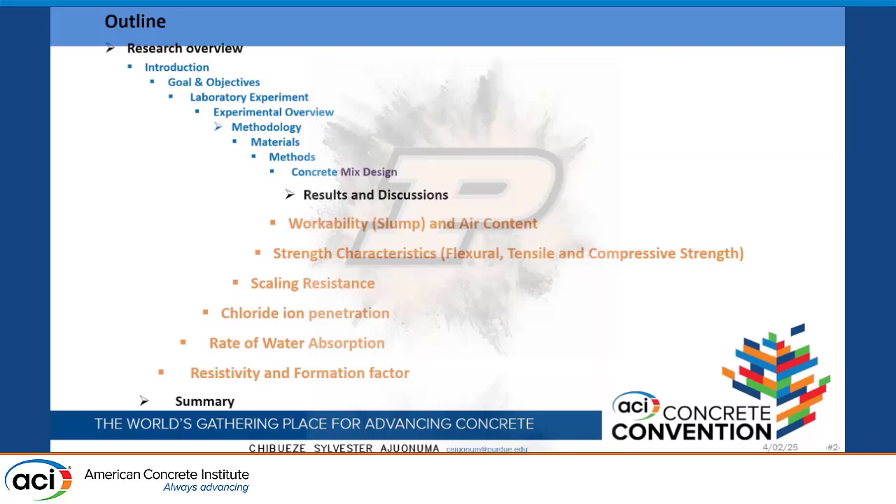Then we'll proceed with the discussion on the results. For our results, we'll talk about the fresh properties, where we'll look at workability, slump, and air content. I'll proceed to the strength properties, where we'll consider the flexural, tensile, and compressive strength. Then some durability properties of our experiment, where we'll look at scaling resistance, chloride ion penetration, the rate of water absorption, the resistivity, and formation factor.

It's a well-known fact that concrete production has been a vital contributor to global carbon emissions, and we cannot overemphasize this. But beyond this, we find that the growing demand for sustainable construction is driving innovative solutions aimed at enhancing both the durability and service life of concrete infrastructures.

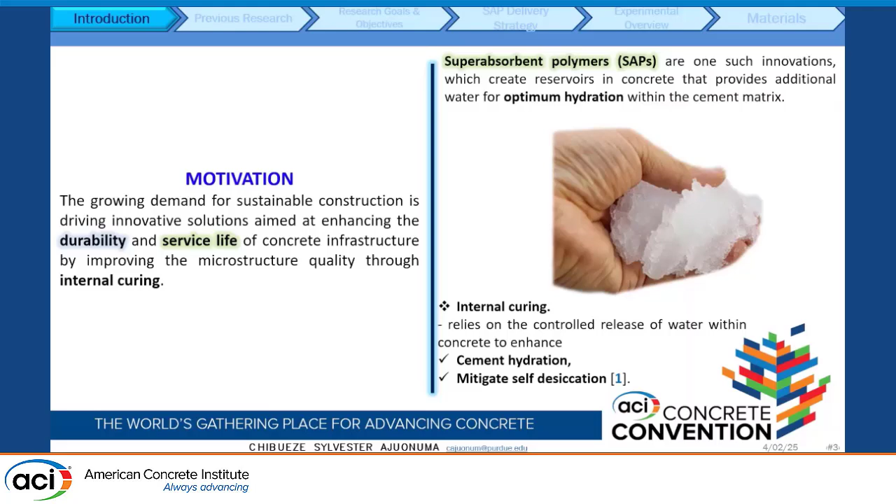We will do this through improvement of the microstructural quality through internal curing. We found that internal curing and superabsorbent polymers, also known as SAP, are key innovative solutions because they create reservoirs within the concrete infrastructure, which provide additional water to aid hydration. We've also noticed that internal curing relies on gradual, controlled release of water within the cementitious matrix, which helps cement hydration and mitigates self-desiccation.

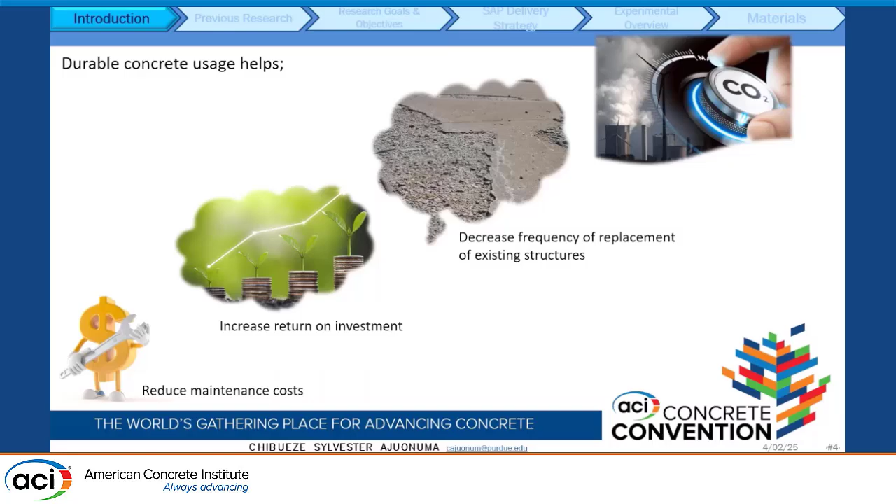This gives rise to more durable concrete, because durable concrete helps reduce maintenance costs, increase the return on investment, and most especially decrease the frequency of replacement of existing structures, and decrease carbon emission.

Just a little overview of superabsorbent polymers, also known as SAPs, or hydrogels. They are cross-linked polymers which have the capacity to absorb a large volume of fluid in comparison with their own mass, forming insoluble hydrogels. They act as internal reservoirs in the concrete, and can also be an alternative to pre-wetted lightweight aggregate for internal curing purposes.

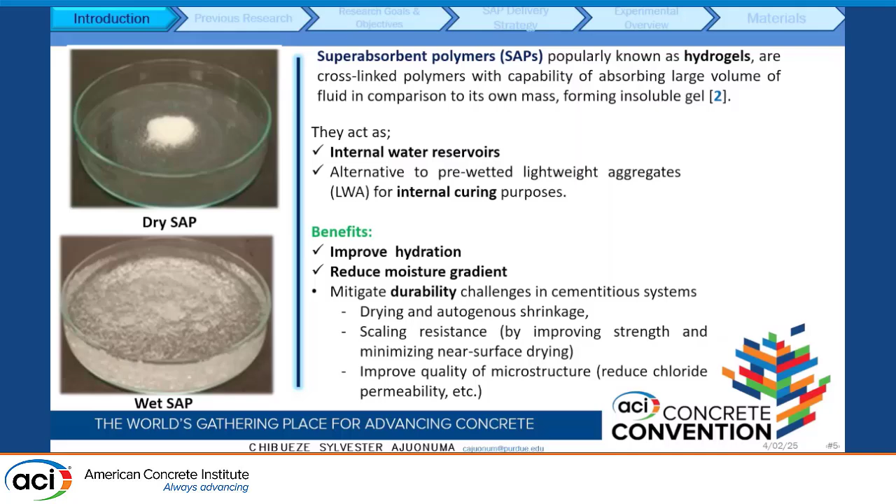From past research, we found that some of the benefits include improved hydration, reduced moisture gradient in concrete, and most especially, mitigation of certain durability challenges: autogenous shrinkage, drying shrinkage, and scaling resistance. They also help improve the quality of the microstructure of the concrete.

From the past research we did, we were able to evaluate the absorption capacity of the SAP needed for this project. We were also able to find the optimal mixing sequence — because most people ask us, when do we add SAP in concrete? We're able to evaluate the mixing sequence. You can scan the code if you're interested in some of the reports we submitted, our past reports.

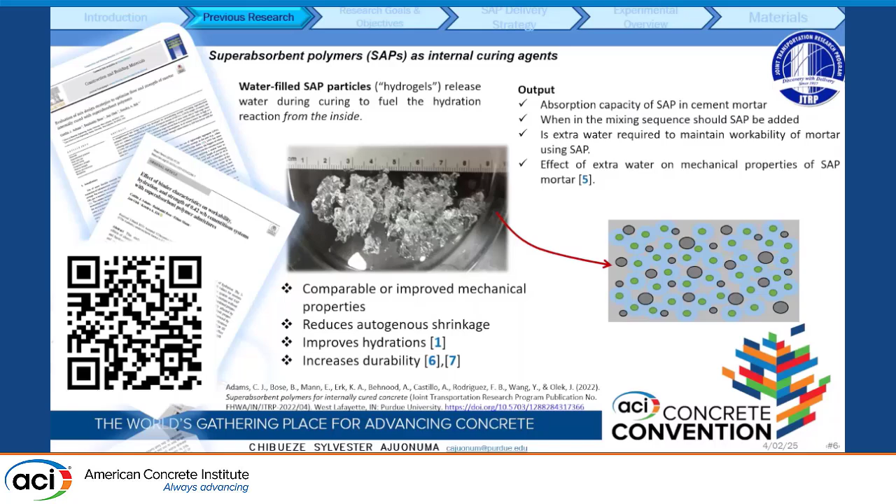Another question we often get is whether we need extra water when adding SAP. We found that you can add SAP without adding extra water, and we also studied the effect of extra water on the mechanical properties with SAP. From this research output, we found comparable or improved mechanical strength, reduced autogenous shrinkage, improved hydration, and increased concrete durability.

Now, for the current project, our project goal is to determine how to deliver the SAP in the field — because beyond the laboratory experiment, how do we actually deliver the SAP in the field?

Our current project goal is to determine how SAP delivery and the mixture composition can affect the curing performance of concrete containing commercial SAP formulation, Type IL cement, slag cement, and colloidal nanosilica. Some of the objectives: we evaluated the internal curing performance of concrete containing commercial SAP, slag cement, Type IL cement, and colloidal nanosilica.

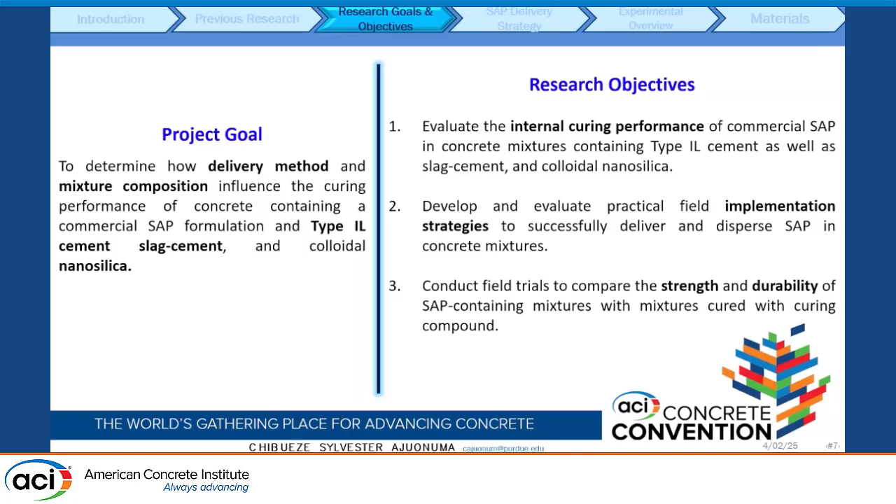Secondly, we developed and evaluated SAP delivery strategies for practical implementation of superabsorbent polymers in the field. Finally, we conducted a field trial where we evaluated the strength and durability properties of concrete containing SAP, and also concrete that we cured with a normal liquid curing compound.

For the second objective, how do we deliver SAP in the field? We developed this: we prepackaged SAP in dissolvable bags. These are water-soluble bags, which we just throw into the mixer, and it automatically dissolves. We're able to prepackage 1 pound of SAP in this bag.

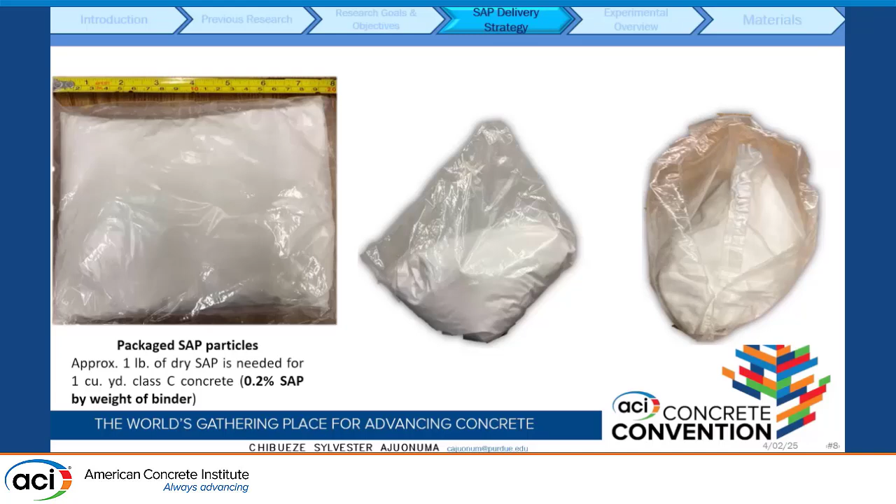This 1 pound of SAP is equivalent for 1 cubic yard of concrete, and we dosed at 0.2% by the cementitious weight. This bag was also, in order to protect it, enclosed in a waterproof bag, because it reacts with water.

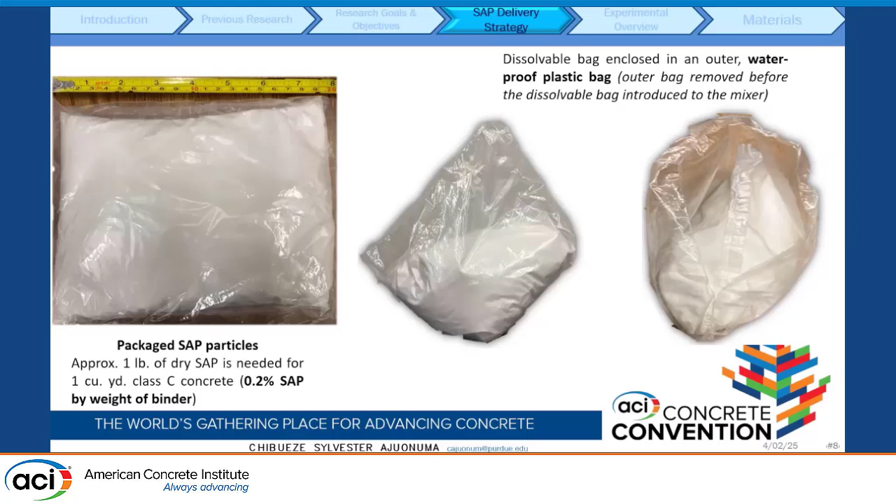So we enclose it in the waterproof bag, which we open, and then toss the dissolvable bag into the mixer. Why I want to point this out, because the field trial was done in a commercial batching plant, so we needed to find an easy way to batch the SAP.

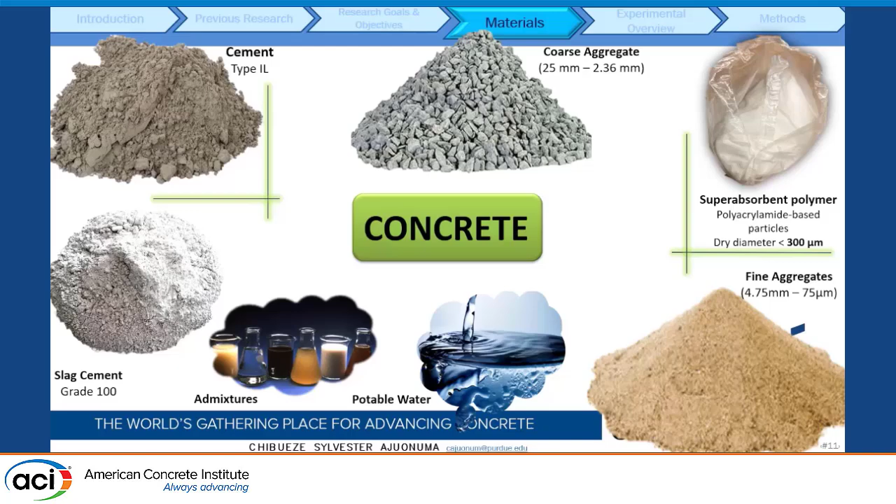For the dissolvable bag, we did some laboratory experiments to evaluate the effectiveness of this dissolvable bag in the field. These are some of the concrete mixing materials we used, and then the mix design for the field. In the laboratory experiment, we scaled down the bag.

Because we needed, that was 1 pound bag for 1 cubic yard, but in the lab we don't need to make one cubic yard of concrete. So we scaled down the dissolvable bag by batching the quantity of SAP we needed, and we had 5 mixes where we had the reference mix.

Then we added 2 delivery methods for the SAP: directly pouring the SAP and using the dissolvable bag. We also did 30% slag replacement, and then also added SAP directly, and then also used the dissolvable bag, to be able to see the effectiveness that the dissolvable bag works effectively before we proceeded to the field trial.

In some of the experiments, from our design, our target slump was between 3 to 5 inches, and air content was between 5 to 8%.

For the laboratory experiments, for the mixtures without SAP, we didn't use a high range water reducer, but for mixtures with SAP, in order to improve the workability, we added a high range water reducer at 400 milliliters per 100 kg.

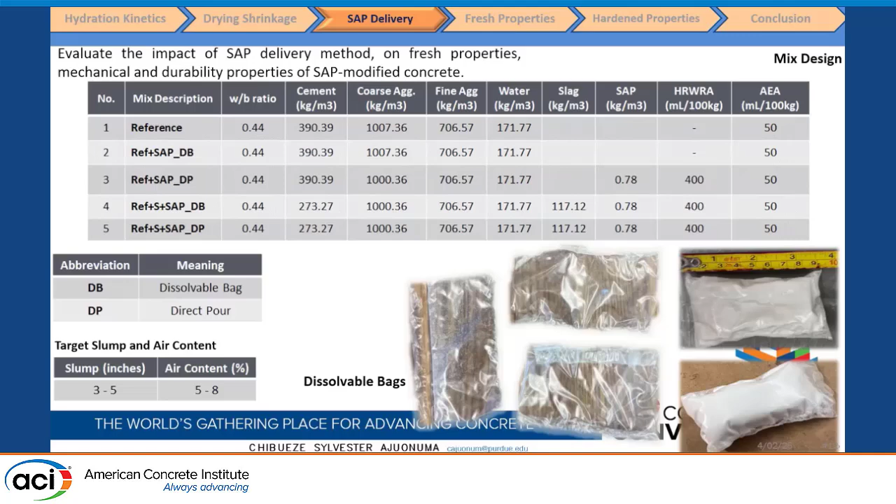We also used air entraining admixture to be able to meet our target air content of 5 to 8%. We tested for the laboratory experiment, for fresh properties the air content, which is very important for us, and then the slump.

We found that for the reference mix, the slump here is at 7 inches, but with the addition of SAP, we found a comparable result from the SAP delivery methods using both the dissolvable bag and directly pouring the SAP. The slump with direct pouring of SAP was at 4.5 inches, whereas using the dissolvable bag was 5 inches, which is close.

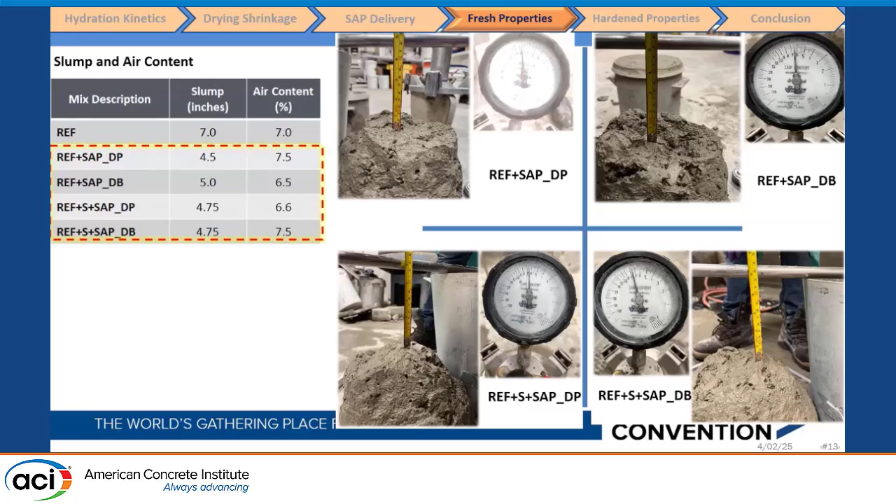For the slag, 30% slag replacement, we had the same slump value and slightly varying air content value. Then we proceeded with the strength characteristics, testing compressive strength at 3 days, 7 days, and 28 days.

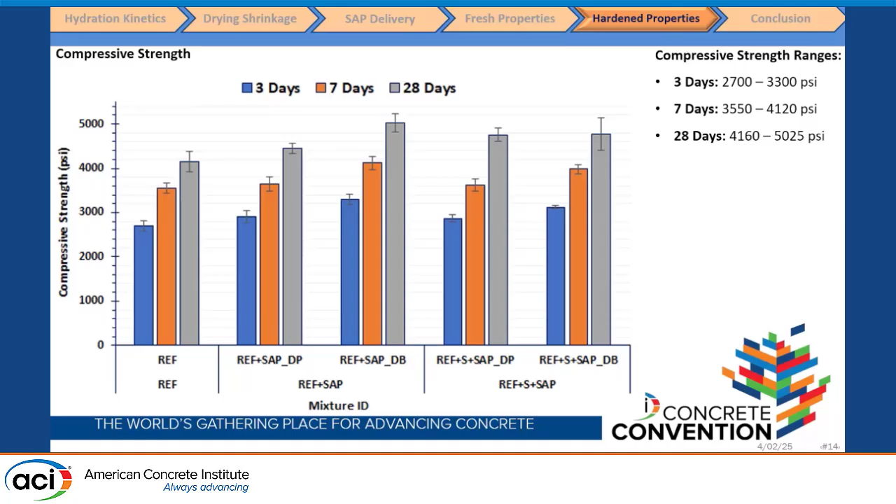We also found correlating values between the direct pouring of the SAP and the addition using the dissolvable bag. The strength values at 3 days were around 2700 to 3300 psi, at 7 days 3500 to 4100 psi, and at 28 days 4100 to 5000 psi.

We also tested for flexural strength at 28 days, and we also had relatable values for the flexural strength at 28 days in both SAP delivery methods.

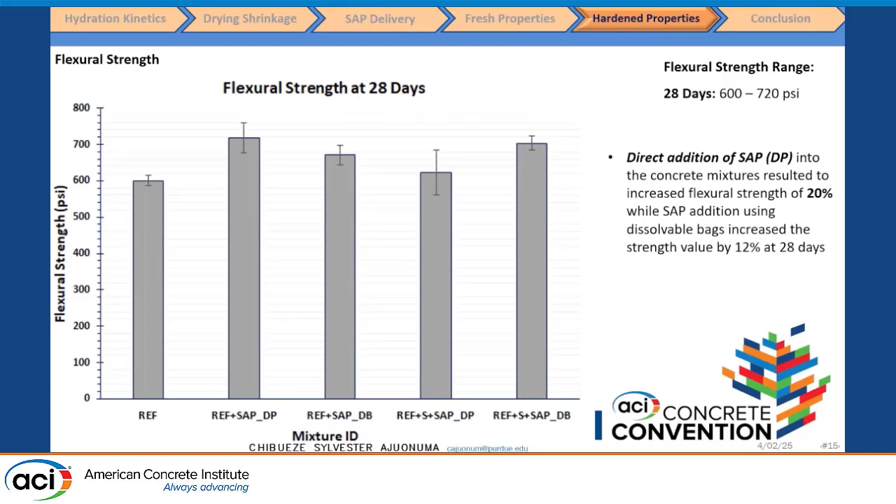Further, we also tested for ultrasonic pulse velocity, using beams and cylinders. We found that the direct addition of SAP had a marginal increase at 3, 7, and 28 days, and also a similar kind of increase using the dissolvable bag, which is DB.

It's a 3%, 4% increase at 28 days, which is also comparable with that of the direct pouring of SAP. The same trend was also observed for the 30% slag replacement.

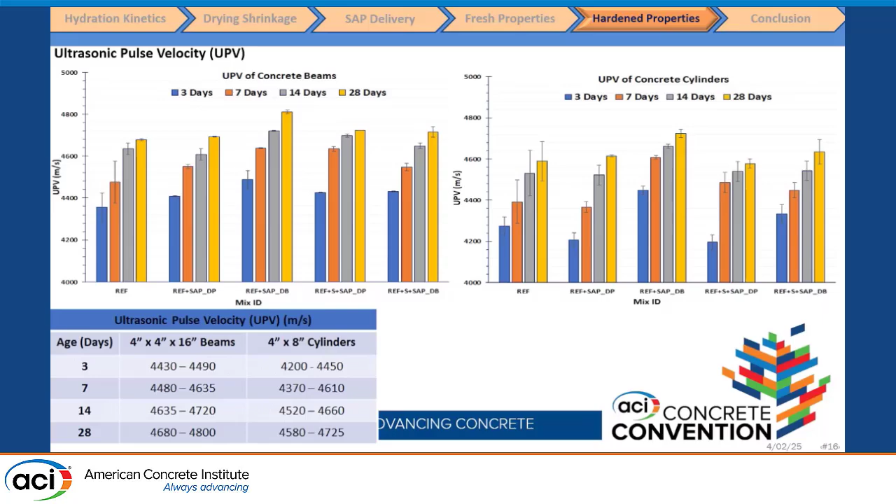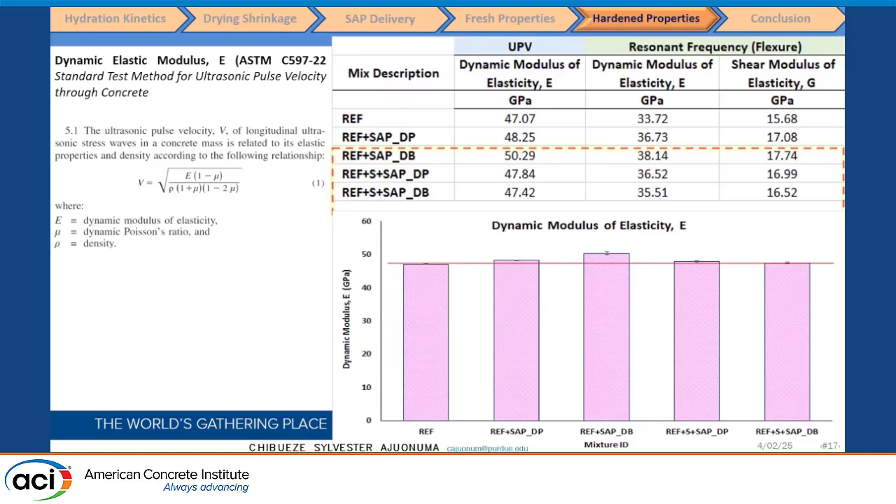With this, we tested for the stiffness of the mix, specifically the dynamic elastic modulus. We found that for both the dissolvable bag and direct pouring methods, the values were close, as can be seen from the plot. We tested using two types and found correlating values. After this, we proceeded from the lab to the field.

We were able to move where things became more interesting when we proceeded to the field. This is the concrete mix design we used for the field.

This is based on the Indiana Department of Transportation Class C concrete, requiring 658 pounds per cubic yard of cement, a water to cement ratio of 0.44, slag replacement of 30%, and we also added SAP at 0.2% by cubic yard by weight of cement.

Since the concrete was batched in a commercial batching plant, we didn't use a high-range water reducer at all. The target slump was between 3 to 7 inches, and the target air content was 5 to 8%.

For the mix, we had six slabs, each 8 feet by 8 feet by 10 inches. Slab number 6 was a reference slab. Slab number 7 was the addition of nanosilica to the reference slab.

Slab number 8 replaced 30% of the type 1L cement using slag cement, and the grade of slag cement we used was grade 100.

Slab 9 used the 30% slag replacement along with the addition of nanosilica. Slab number 10 was almost the reference mix, 658 pounds per cubic yard of cement, but with SAP added. Slab 11 was the 30% cement replacement combined with SAP.

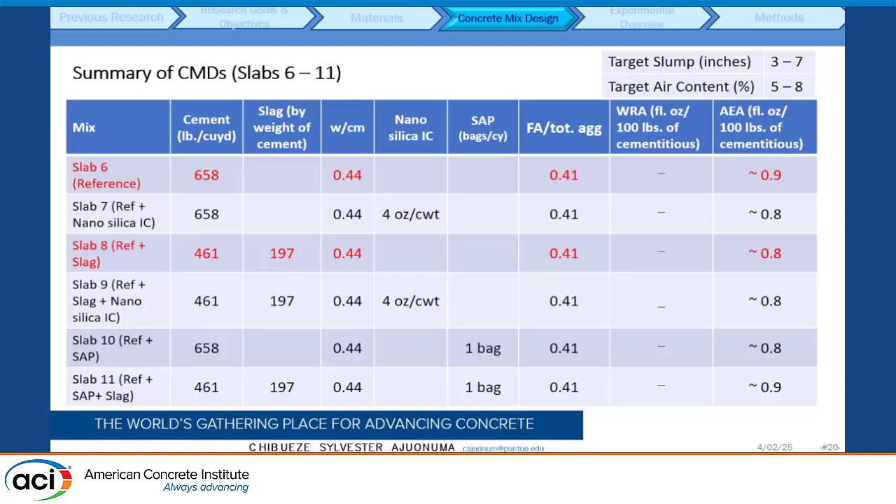This here is the CAD drawing we proposed, and this is the formwork in the field. It was a very cold September morning.

We also hired the services of professional concrete finishers to help us finish the concrete, so we could get a near real-life concrete finishing.

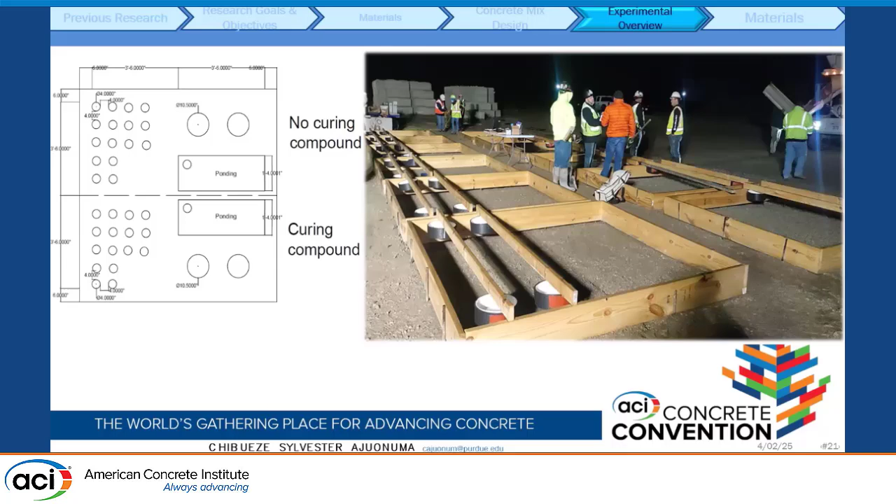And the slabs were cast.

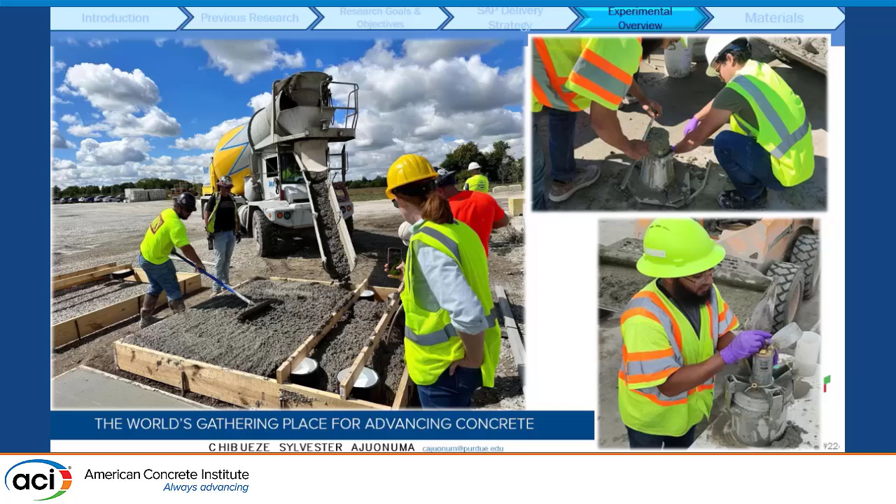We also made provisions and improvised for some cylinders, which we eventually extracted to test for scaling resistance. We tested for fresh properties, both the slump and the air content, in the field.

This is the work of the professional concrete finishers. We ensured that the concrete surfaces were finished to replicate a real-life application.

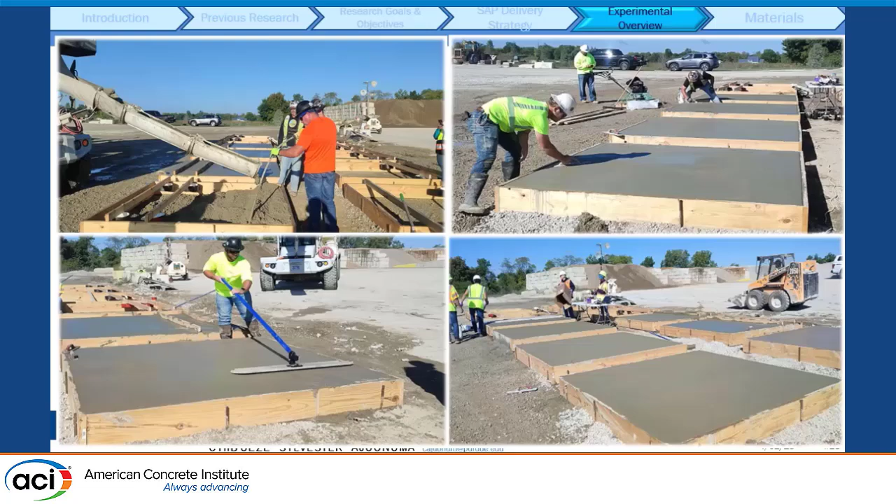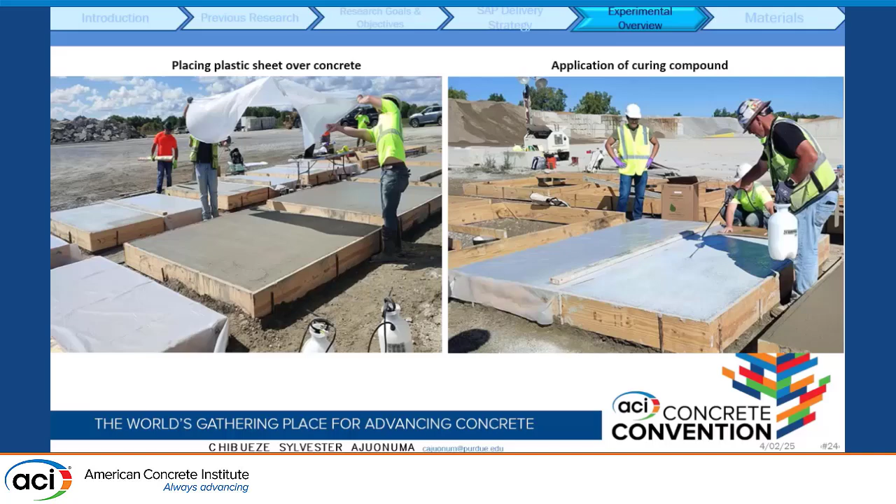For curing purposes, plastic sheets were used. The slabs were segmented, with half covered using a plastic sheet, and the other half treated with an applied liquid curing compound. This is an overview of the slabs we had.

We had slab number 6, the reference slab, as well as slabs 7, 8, 9, 10, and 11. We also had some beams.

We cast 12 beams, 6-inch by 6-inch by 18-inch, for flexural testing, as well as some prismatic samples for drying shrinkage testing.

We also had some cylinders which we cast in the field but transported back to the laboratory so we could test them in the lab.

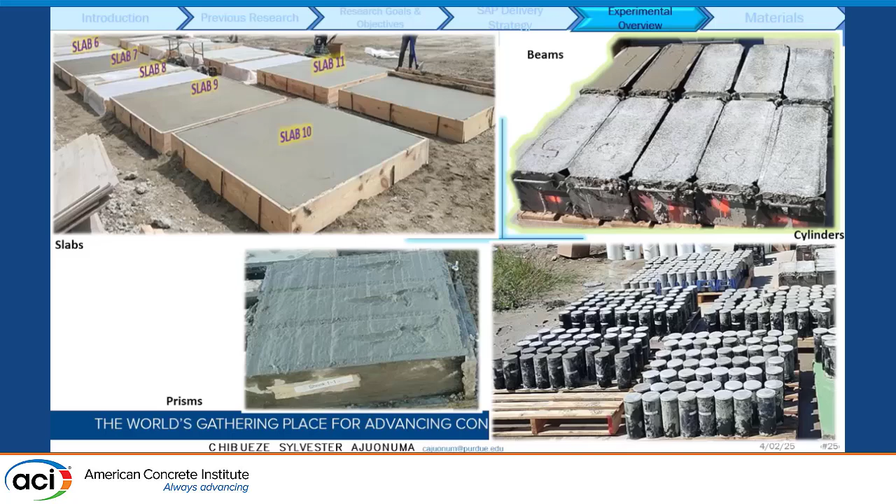At testing ages of 7, 28, 56, 90, and 365 days, cores were extracted from the slabs in the field and taken to the lab for testing.

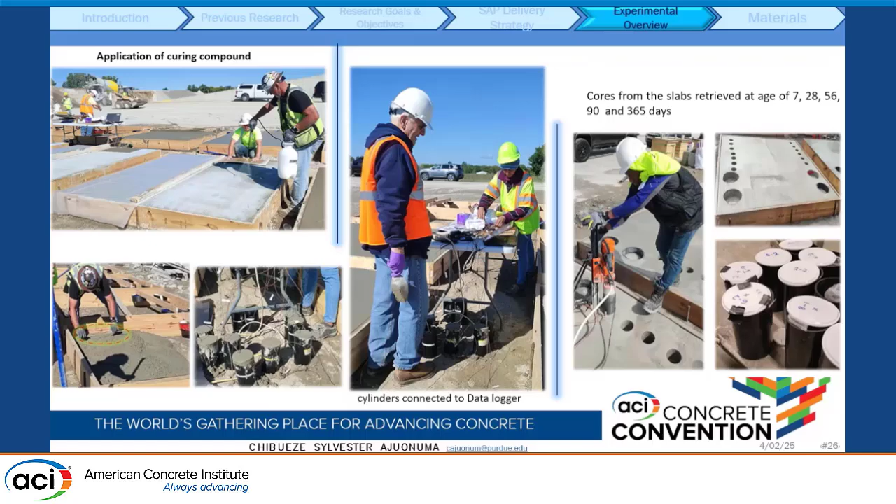We also had two curing regimes for this experiment: lab curing and field curing. We had specimens cast in the field but taken to the lab, where conditions included a constant temperature of 23 degrees, relative humidity of around 50%, and wet curing.

Some of the variables included curing compound applied on some samples and not on others, as well as the addition of nanosilica and samples with SAP.

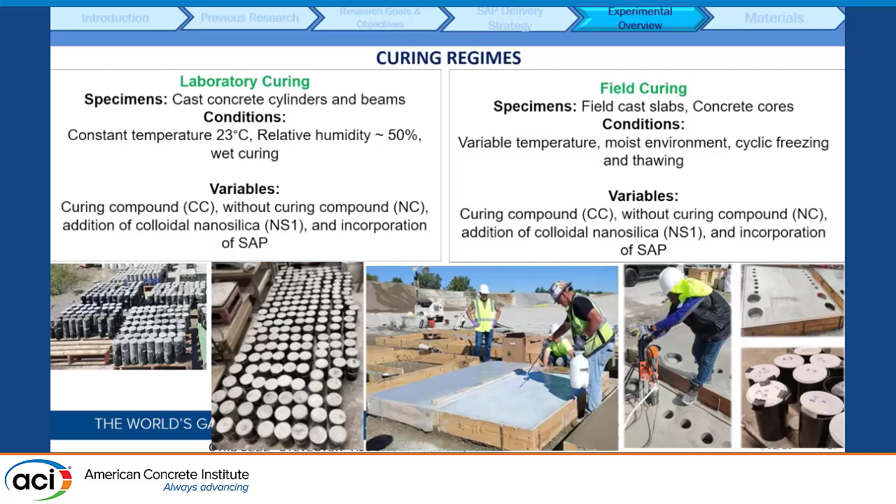For the field cured experiment, we had variable temperature, cyclic freezing and thawing, and moist conditions. We applied the same variables for the testing method we used.

We tested for fresh properties using the relevant ASTM procedures, along with specimen specifications. We tested fresh concrete for compressive strength using cylinders, and for flexural strength using 6 by 6 by 18 inch beams.

For splitting tensile strength, we extracted cores from the slabs in the field and tested them. For scaling resistance, we also extracted and tested cylinders, as well as for resistivity and formation factor.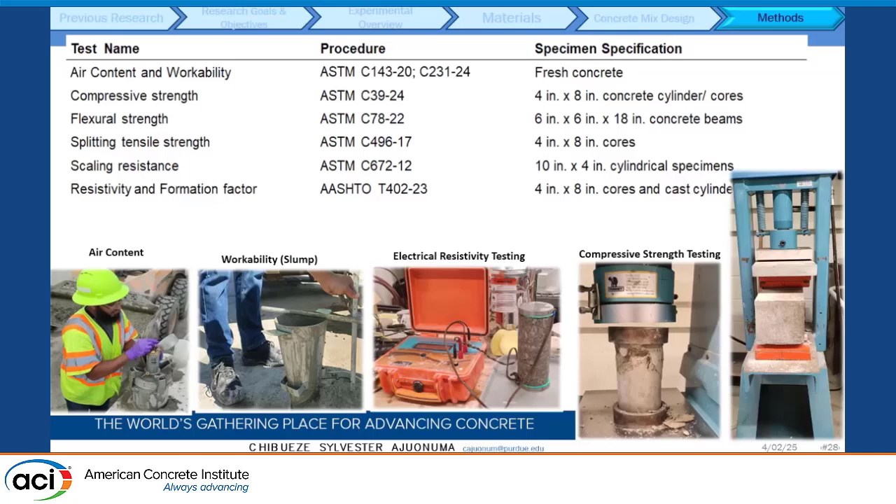For the scaling resistance, during the formwork we improvised by creating special 10-inch by 4-inch cylinders, which we extracted. We power washed them to remove the curing compound, and they were diked using a 4% calcium chloride solution.

They were diked and exposed to 50 cycles of freezing and thawing: freezing at minus 18 degrees Celsius for 16 hours, then thawing at 4 degrees Celsius for 8 hours. The deicing solution was replaced after every 5th cycle. At the end of 50 cycles, we evaluated both mass loss and visual inspection.

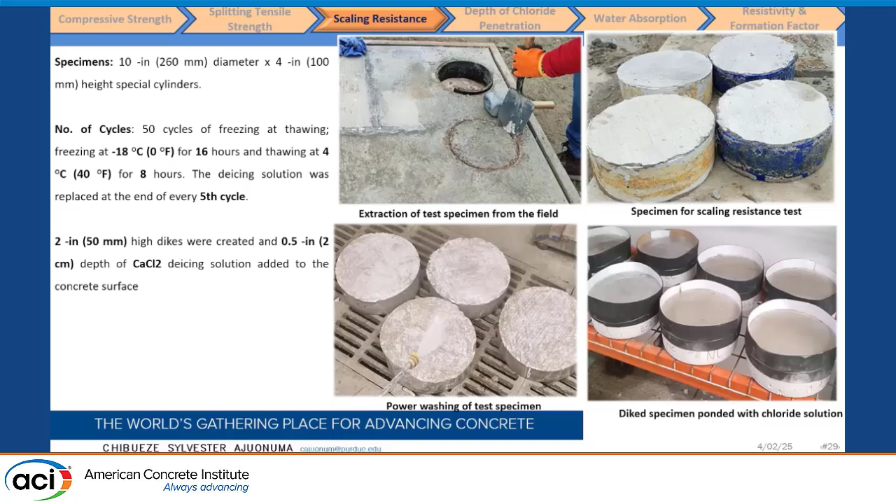For the depth of chloride penetration, the slabs in the field were also cleaned and diked using 4% calcium chloride. After 28 days of casting, they were diked, and the solution was left for 150 days.

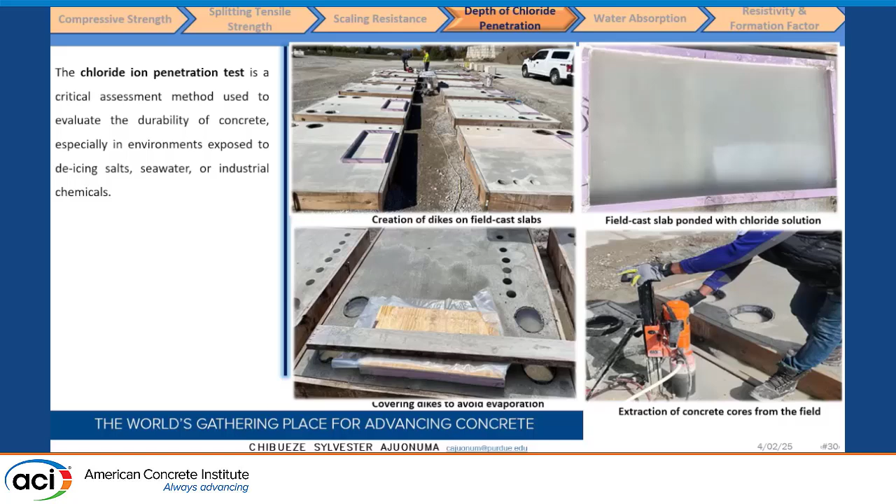At the end of 150 days, we extracted cores from the diked portions, and after splitting them, we applied silver nitrate to evaluate the depth of chloride penetration. The same was done for rate of water absorption, testing both the cores extracted from the field and the cast ones cured in the lab.

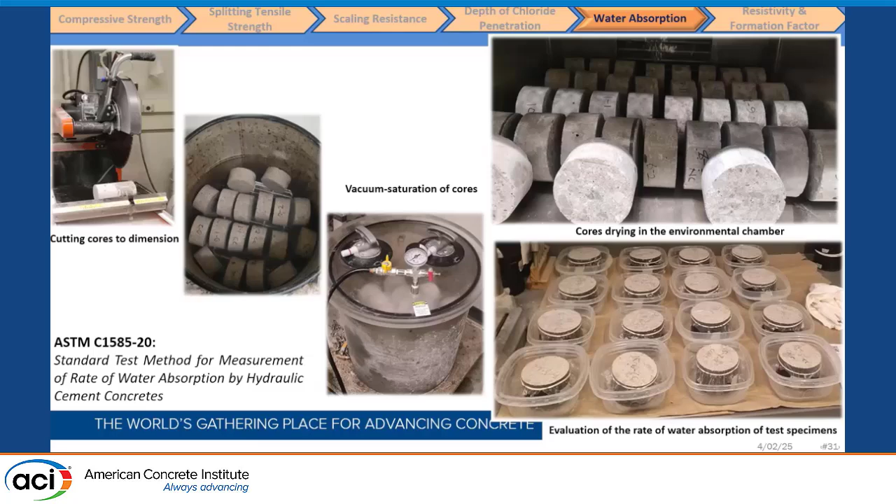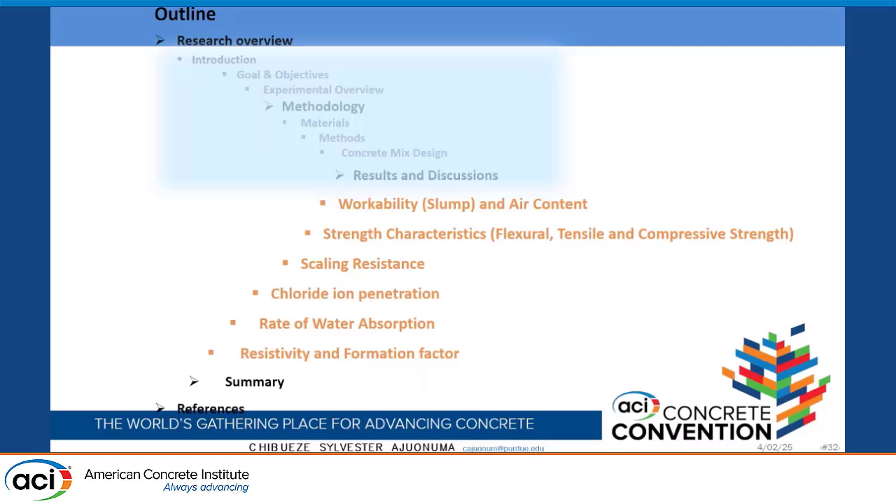At this point, we'll proceed to talk about some of the results we obtained. First, on fresh properties, we noticed that the addition of SAP caused a decrease, a reduction in the slump value and workability.

But with the addition of SAP, the slab number 11 that had slag in it also compensated for the reduction in workability. I also need to emphasize that all the mixes met our target air content and target slump.

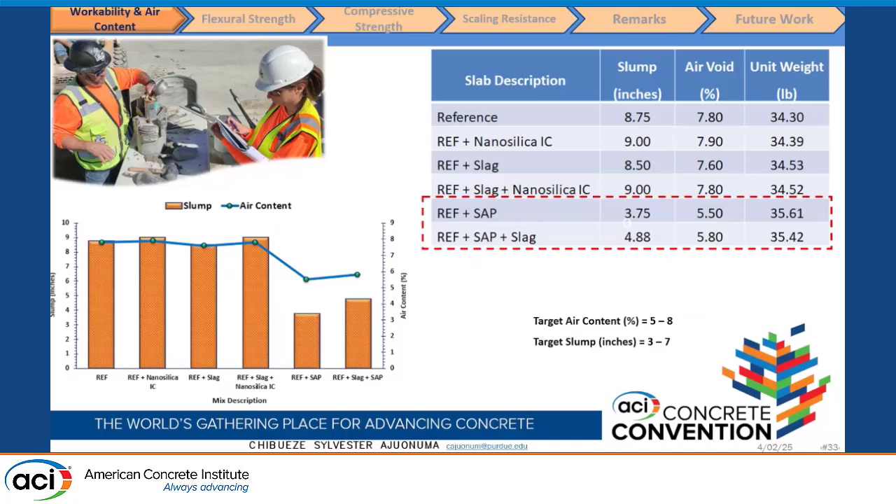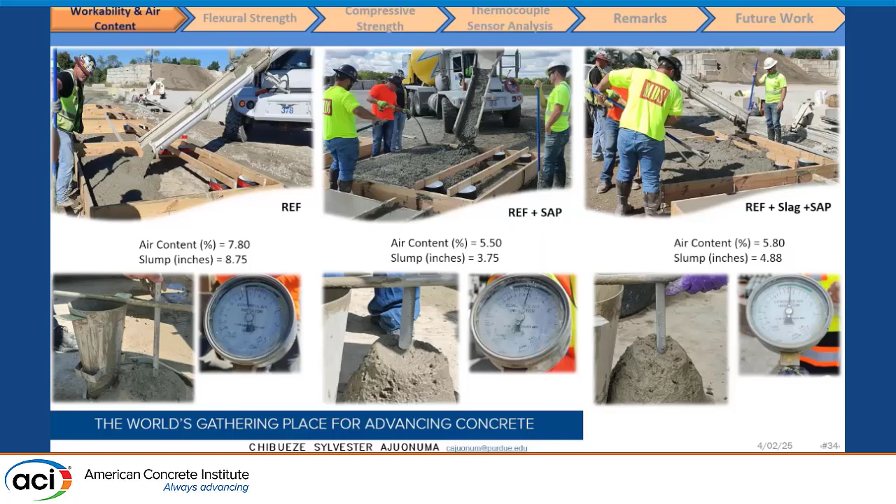These are some pictures of the mixes when they were cast. With the addition of SAP, shown in the middle picture, the mix became a little stiff, and the professional finishers didn't want to finish it because they didn't want to spend more time trying to finish the concrete, so most of them had their own reservations. But when we included slag, it improved the workability of the mix.

For flexural strength, the beams were tested at 4 days, since we're looking at how early we can open this pavement to traffic. So we tested at 4 days, and these are some of the results we obtained.

The range of results was between 400 psi and 550 psi for flexural strength at 4 days. The Indiana Department of Transportation standard specification requires a modulus of rupture of 570 psi at 7 days for structural concrete.

They also made provision for concrete patches for pavement and bridge decks at 550 psi at 3 days. We found that the addition of SAP helped improve the flexural strength. Also, notice the third bar: the mix with 30% slag replacement had reduced flexural strength.

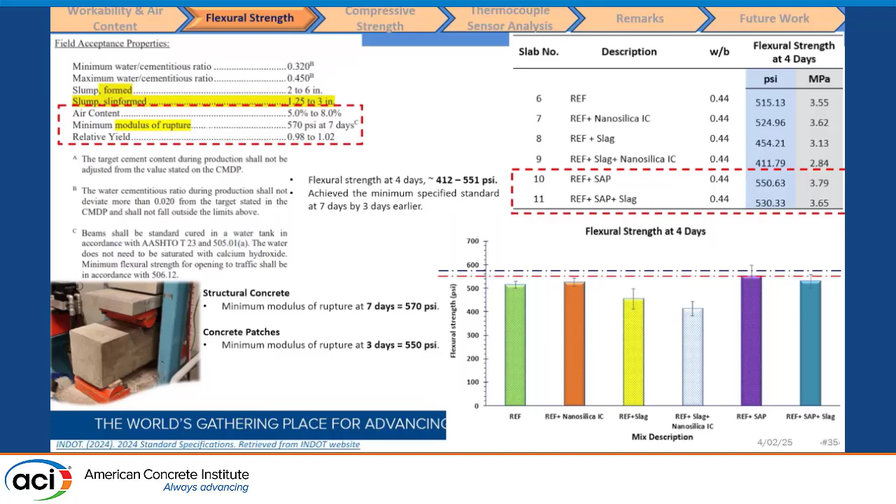But when we added SAP to the slag mix, it also improved the flexural strength. So there's a synergistic effect between SAP and slag in improving flexural strength, especially at early age, compensating for the early age strength reduction.

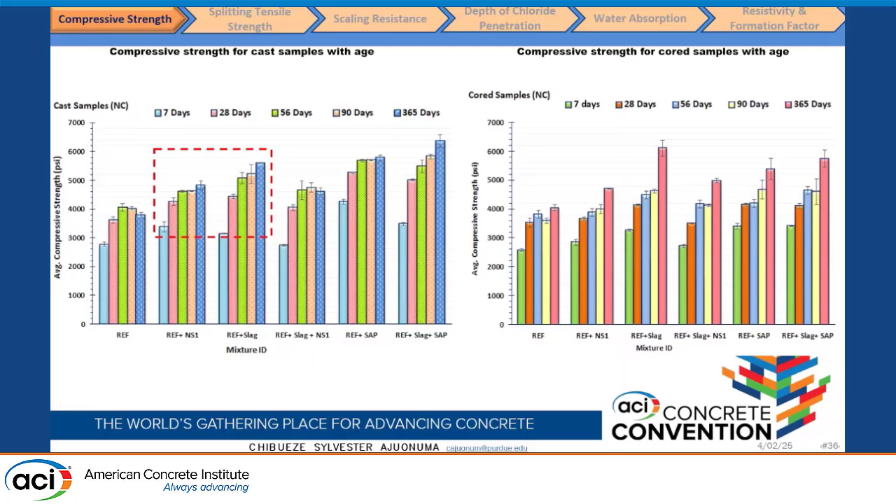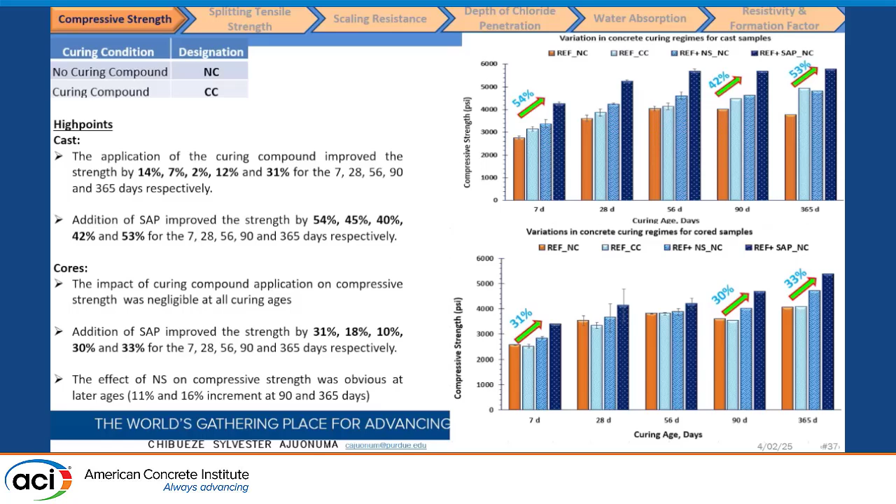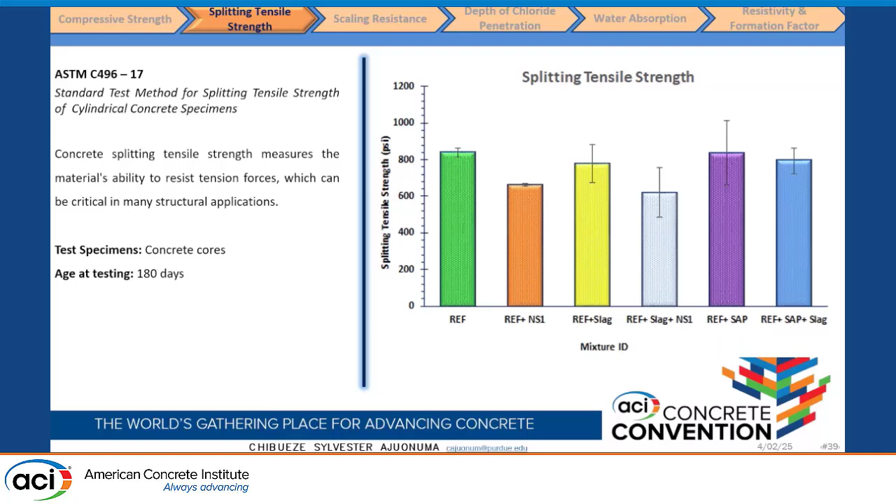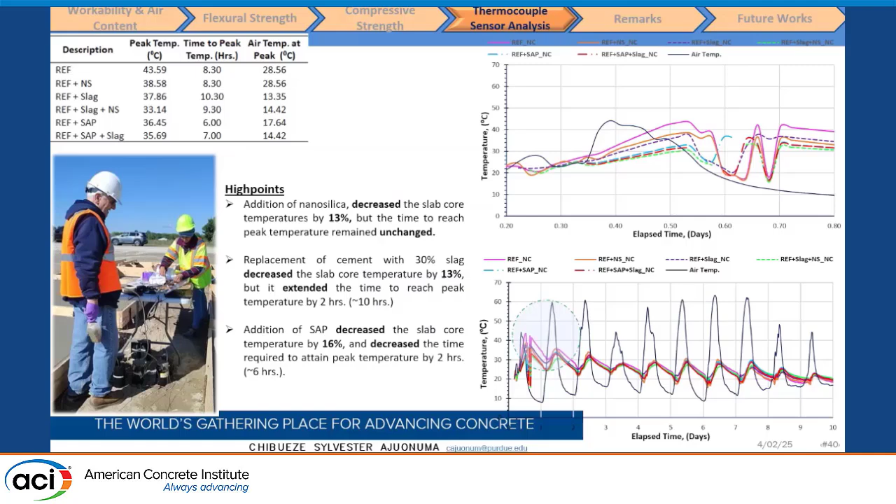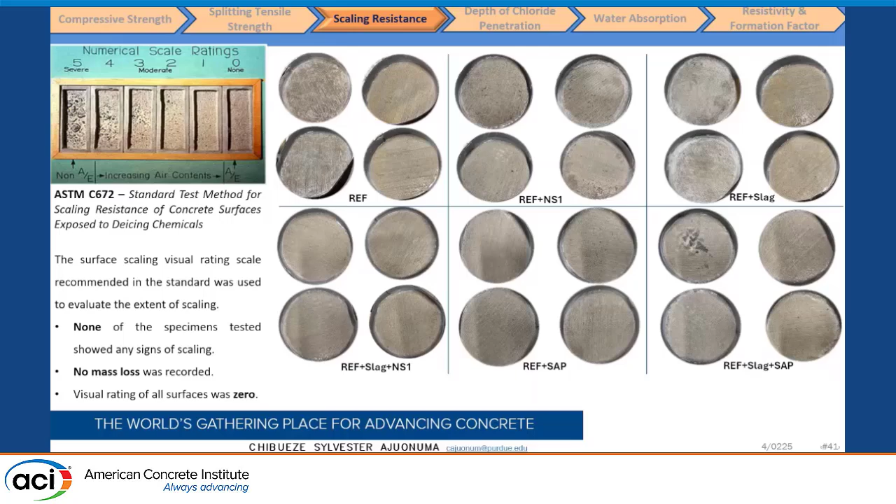Moving forward, we look at some of the durability results for scaling resistance at the end of 50 cycles using visual inspection. We found there was no mass loss, and the visual rating was 0 for the slabs, and we also examined the depth of chloride penetration.

At the end of the application of silver nitrate on the cores, we noticed that the addition of SAP and 30% slag replacement helps refine the microstructure, leading to a reduction in the depth of chloride penetration. SAP introduced a kind of void in the mix, but the combination of SAP and slag helped refine the microstructure, reducing the depth of chloride penetration for the mixes.

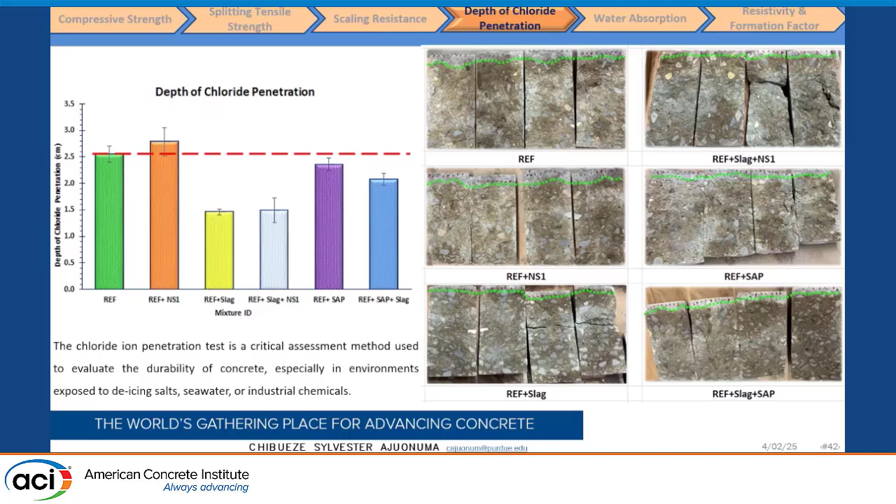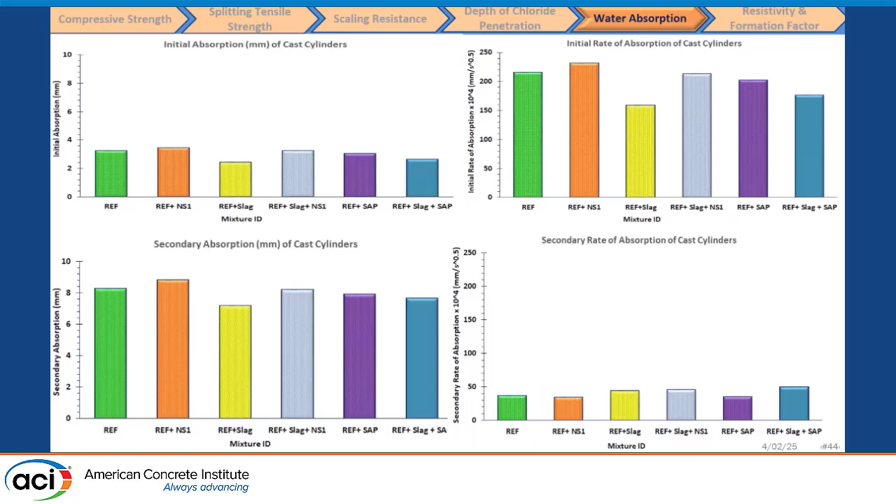For water absorption, we noticed a gradual reduction in both initial and final water absorption by the addition of 30% slag cement in the mix.

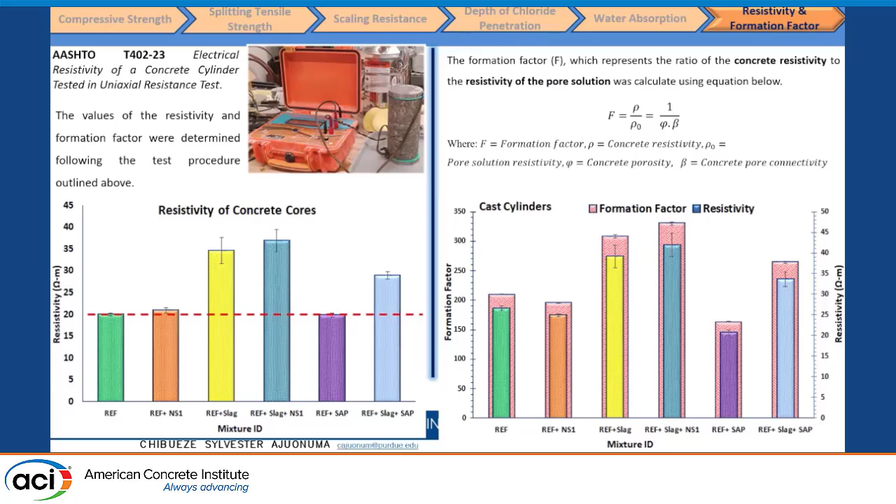Finally, we look at resistivity, which correlates with the depth of chloride penetration. We noticed the addition of slag increases the resistivity and the formation factor for the mixes, showing refinement of the microstructure and improvements in reduction of permeability, which translates to higher durability for the concrete mixes.

In summary, we found that the use of a dissolvable bag was very effective for SAP delivery in the field, achieving adequate dispersion and mixture consistency. We also found that the addition of SAP and slag helps improve the early age performance of mixes, comparing the SAP-free mix with the mix with SAP, it helps improve the early age reduction associated with some slag mixes.

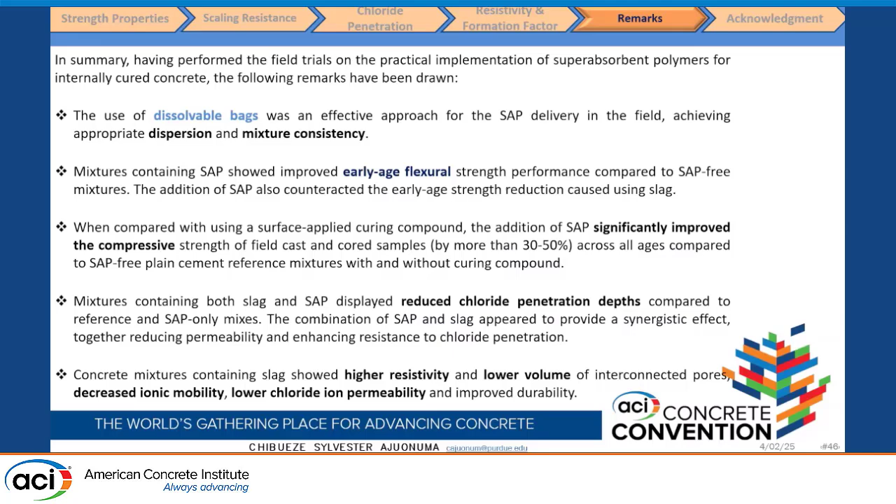Compared with surface curing using a surface curing compound, we found SAP significantly improved the compressive strength, both from field cast and cores, across all ages. We also found that mixtures containing both SAP and slag displayed reduced chloride penetration depth compared with SAP-only mixes. This shows a synergistic effect that helps reduce permeability and enhance resistance to chloride penetration. Finally, we found that concrete mixes containing slag show higher resistivity as well as low chloride permeability.